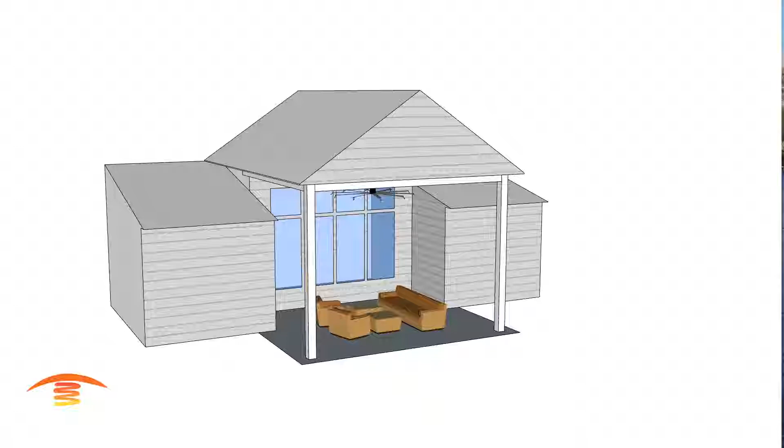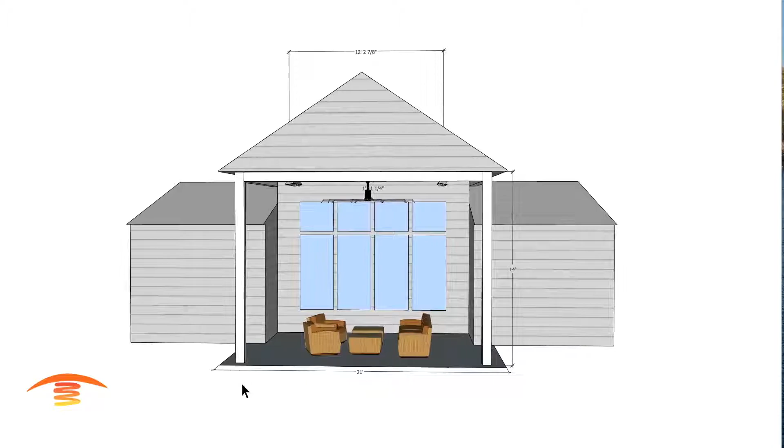Today we're going to take a look at this residential application. Here you can see we have this rather large structure. Let's go ahead and look at the dimensions. We have a 14-foot height at the bottom of the ceiling, 21 foot from this direction, and 17-foot depth here. Now these walls could be in or out a little bit further, and left or right a little bit further either way, but that's not that important.

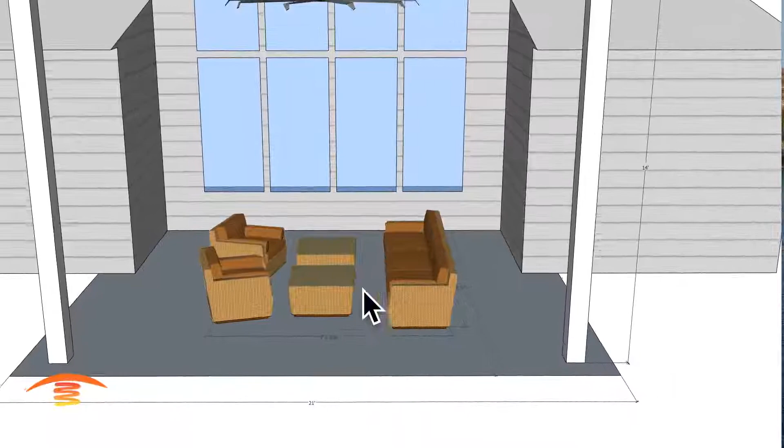The customer primarily wants to heat up this seating area. My seating area I show here is just about 9 foot by 9 foot, we'll call it.

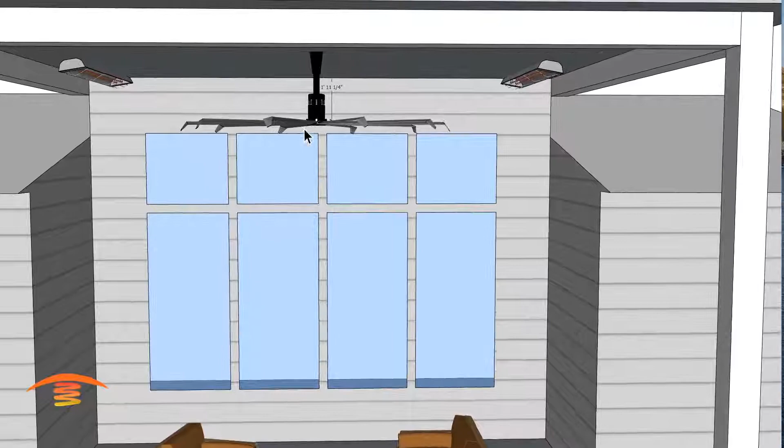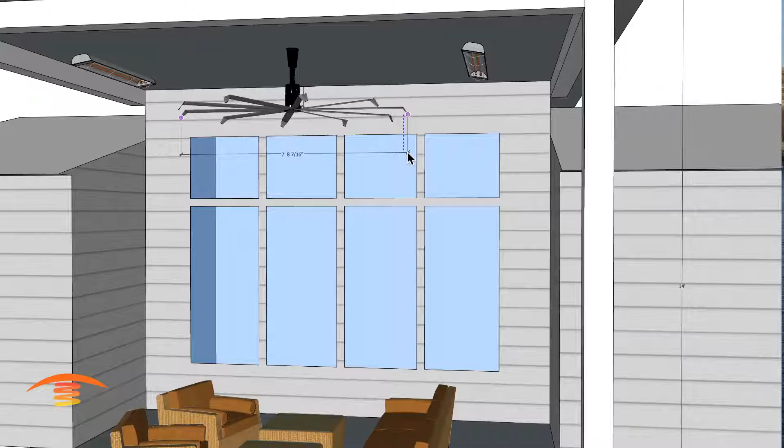Some of the dilemmas they have here with placing heaters is we have this fan. The fan comes down about 2 feet, and the width of the fan is about 7 feet 8, 9 inches, somewhere around there.

So what I've done here is, because of the height, I'm using either the WD6024 6000 watt unit or the CD6024. These have dual elements in it, so it's 6000 watts. You could place a control system on it if you like.

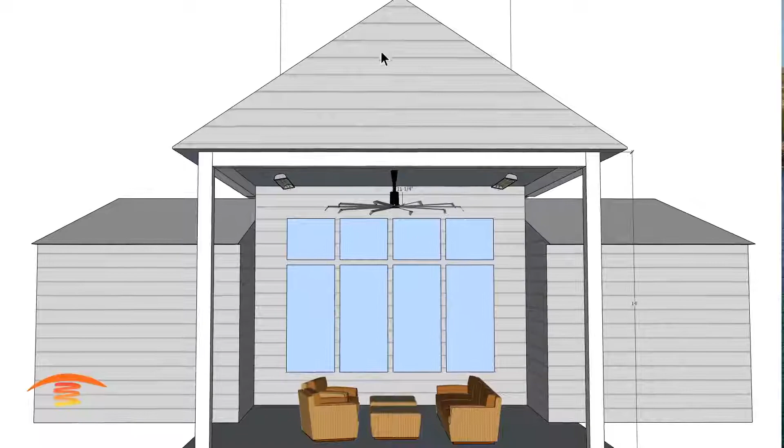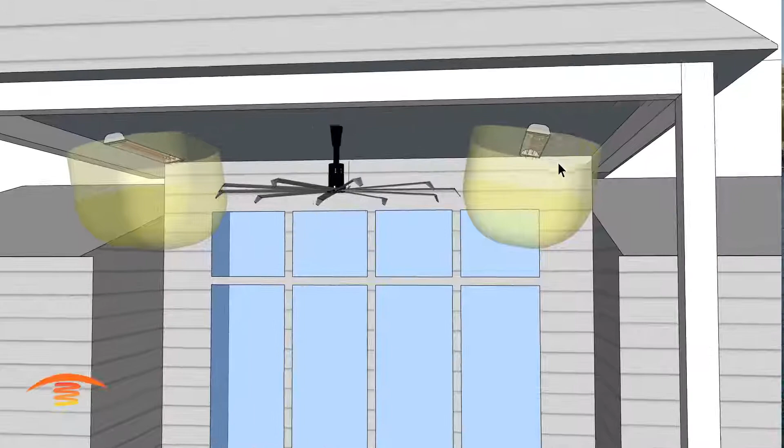You can see in this application I have them at about 12 foot 2 centers, and here's the reason why. What we want to do is make sure that our clearances all around the face of the heater are met, and not hitting this blade in any way. This is not the heat ray, this is actually just the clearance of the heater.

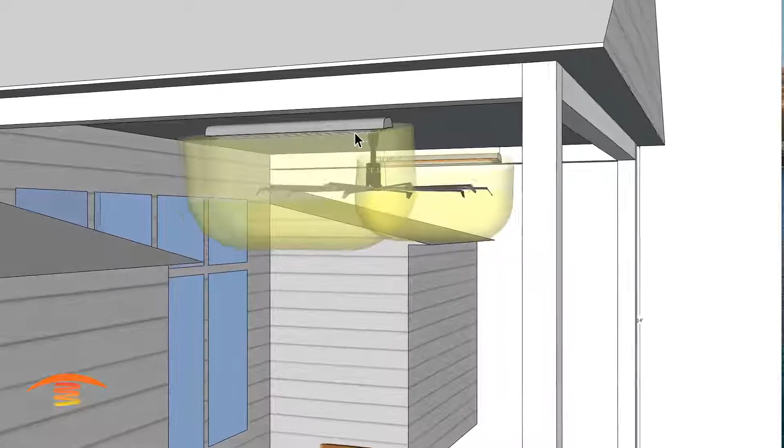You can see that I placed the heater center with the fan center in the room. Let me just go ahead and turn off these dimensions.

I also have these at a 10-degree angle. The reason I want that angle is I want this ray. We'll go ahead and just turn the ray off, and clear that off. So you can see this is really the maximum height the Infratech can be mounted. I'm going to have some crossover ray here.

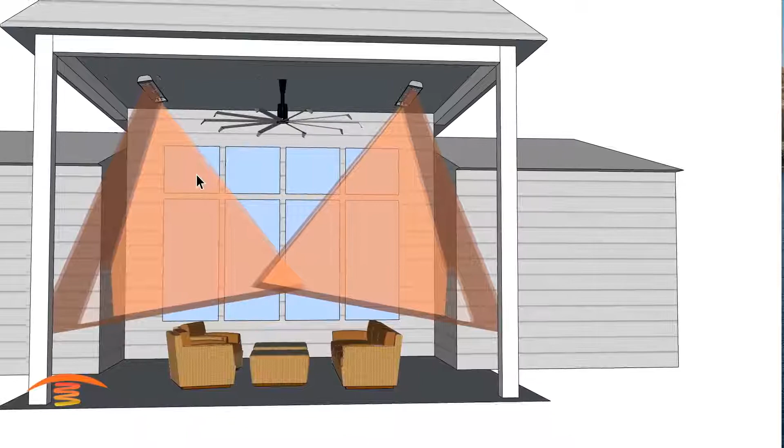This ray is going to extend out beyond this point that I show here, but this is the predictable, acceptable amount of heat at the capacity of this heater to broadcast the heat out from. Now the ray will continue down, beyond this point here, and we'll have some crossover, especially here in the middle.

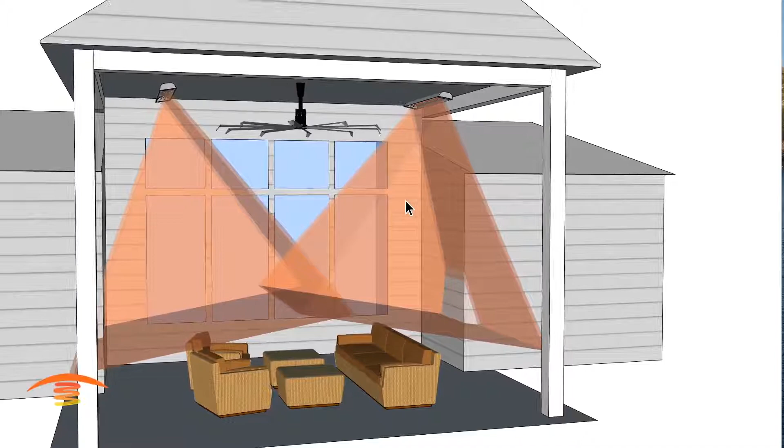But without having a high intensity heater, 6000 watt at this height, you're really not going to feel anything else that would be anywhere acceptable. Here you can see that we're getting a good coverage of that space. You're going to get roughly a 10 by 12 - 10 foot this way, 12 foot this way with the heater - but you can see even with this 10-degree angle, we're throwing some of the heat back here.

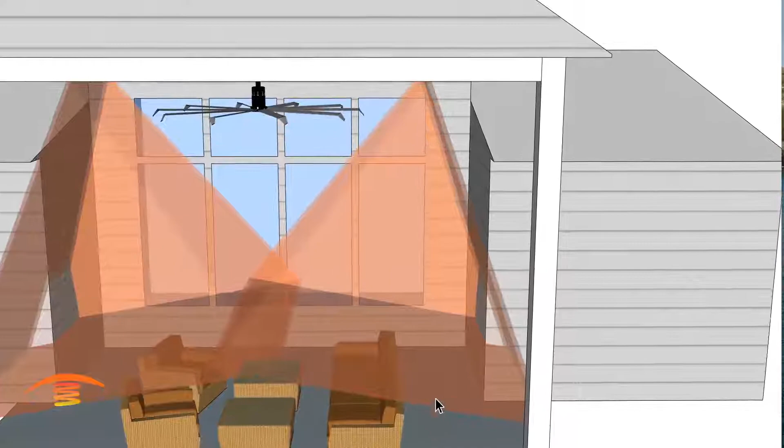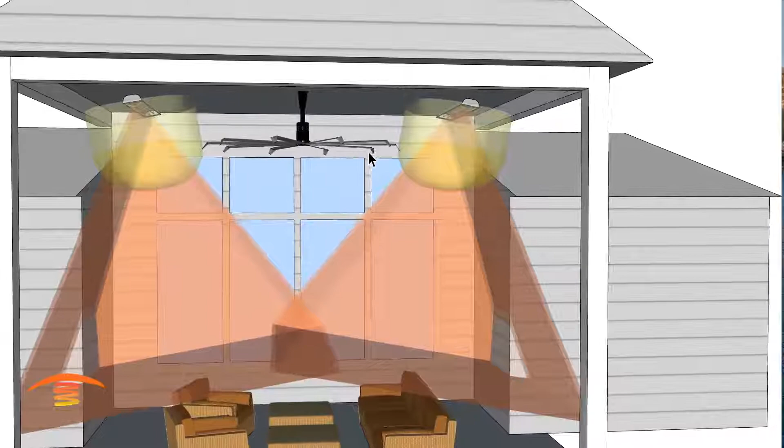But if we change this angle any further, then we're going to end up having this clearance issue with the fan blades. Now the fan blades could be aluminum, but in that case, we don't want that ray hitting the aluminum and compromising the integrity of that aluminum after prolonged use. So that's why I'm choosing this particular model, and placing them in the position I have them.

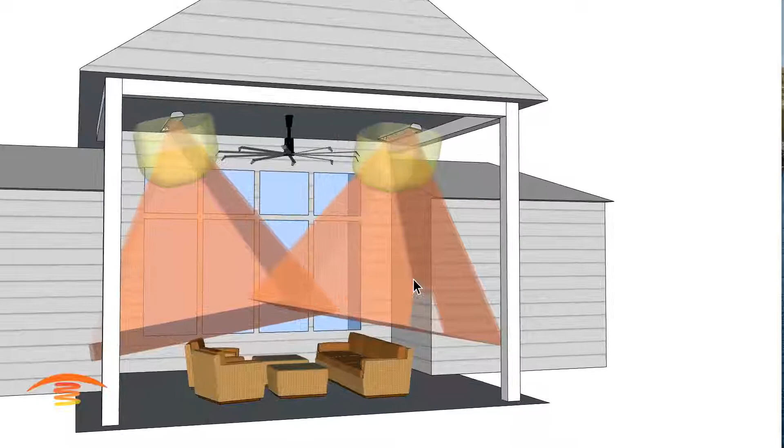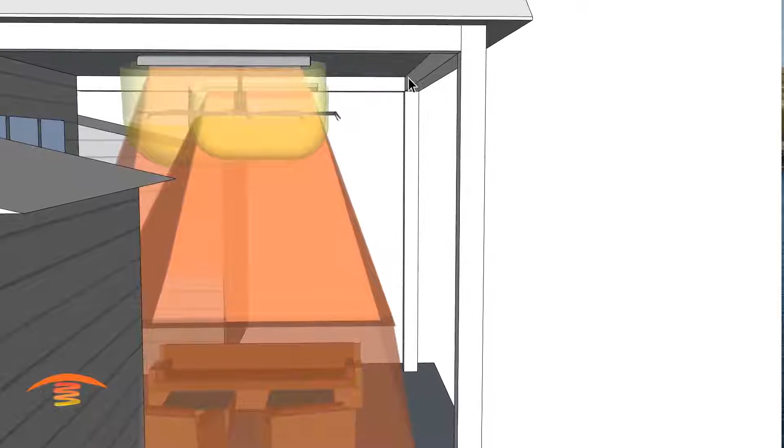Now you could place them a little bit further off, but we're just not going to be able to reach the center seating area very well. If you placed one over here versus over here, it's essentially the same thing. We probably can't even meet the clearance here, because we have a 6-inch clearance back here that we have to deal with, as well as any clearance from the face, which is 18 inches off this edge. So I think this would be probably the best position for this particular application.